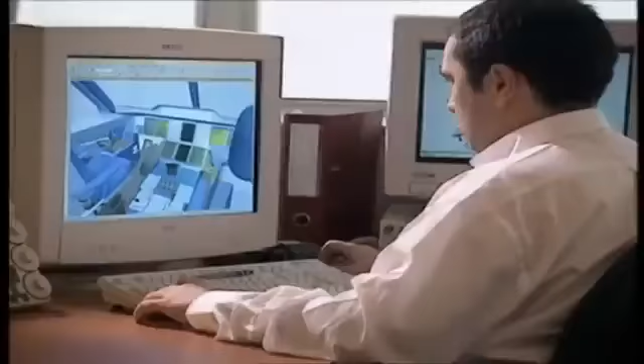It's a mega plane, bigger and heavier than any other passenger plane in the sky. It will hold more people than any commercial jet flying. Designers have spent billions. Now is the moment of truth. Will the world's biggest passenger airliner survive its maiden flight?

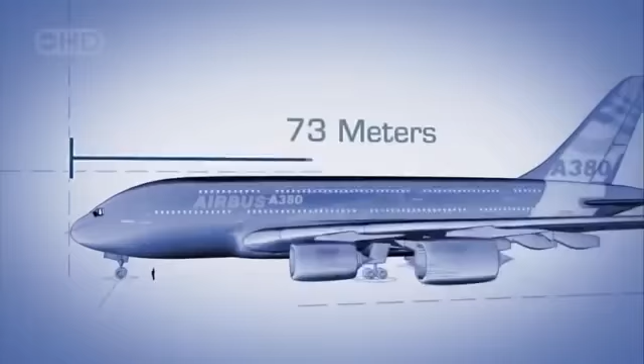An early spring morning, clear skies and a light breeze over southwestern France. Crowding the fields that flank Toulouse International Airport, 40,000 spectators, backpackers, campers and journalists from around the world, all vying for the perfect spot to watch the maiden flight of the Airbus A380, the largest passenger plane ever built. It's 73 meters long, 7 stories tall at the tail, almost 80 meters from wingtip to wingtip, heavier, longer and taller than a 747, with 2 full levels of seating, enough to hold over 550 passengers.

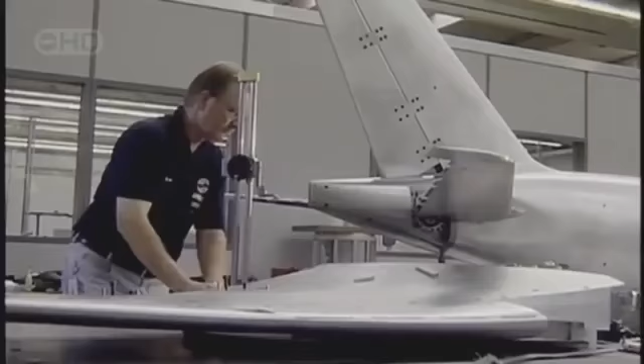Getting this monster off the drawing board required new, super lightweight materials, 4 powerful new mega-sized engines, massive new factories across Europe, and a computerized flight control system more sophisticated than any other in commercial aviation. This moment is the biggest gamble that the company has ever taken. A $12 billion investment, the company's entire future, and the lives of future passengers all ride on the success of this historic test flight.

Alongside the runway, a hush settles over the crowd as the megaplane comes into view. Gradually, it gathers speed, accelerating to reach its takeoff velocity of 269 kilometers per hour. Then, as it nears the end of the runway, the moment of truth. The massive nose tilts skyward. A sliver of daylight appears beneath the rear wheels, and the Airbus A380 takes to the sky for the very first time.

The engineers and technicians in the crowd breathe a collective sigh of relief. Their baby is flying.

The question now is, does anyone want a plane this big? Will the unprecedented size prove a boon or a boondoggle? Is this super jumbo the future of commercial aviation? Or the biggest white elephant since Howard Hughes built the Spruce Goose? It all depends on whether Airbus can convince airlines that travelers will want to trust their fates to this flying cruise ship.

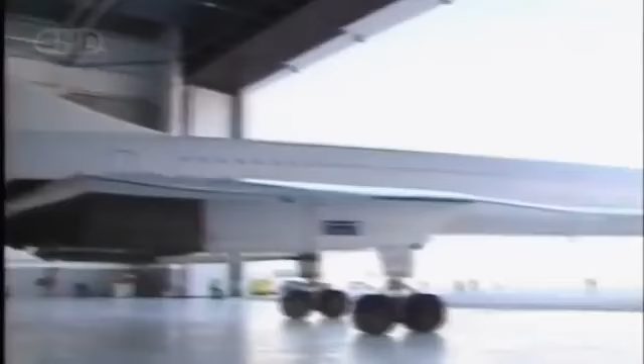The Concorde, after years of financial difficulties and a devastating crash in Paris, has been grounded. And the 747 is now an aging workhorse, noted less for style and more for the sheer number of passengers it can pack between its wings.

What changed to turn air travel from a luxury to the airborne bus ride that it is today? Simple economics. In just a few short decades, the number of people traveling by air has tripled. Now, every day, hundreds of thousands of people pack into 70,000 flights, taking off and landing at more than 4,000 airports around the world. And those numbers are only going to get bigger, much bigger.

Industry analysts predict that the number of air travelers could double again by the year 2020. That is, if anyone can figure out how to squeeze them into an already overcrowded system.

Both Boeing and Airbus saw the writing on the wall in the 1990s, but the companies each took a very different bead on the problem. Boeing believed that one of the biggest increases in air travel would be point-to-point flights: get on near your home, get off near your destination. Boeing put its muscle behind the 787 Dreamliner, a highly efficient plane designed to carry an average of only 250 people.

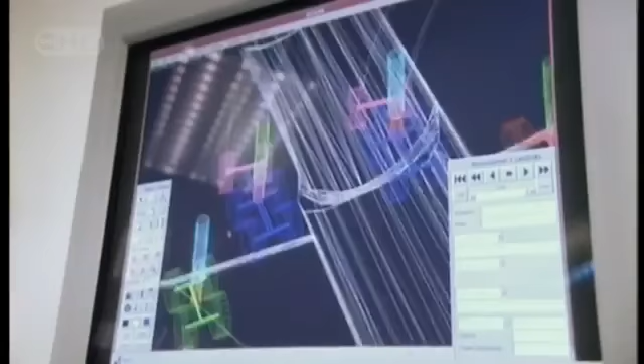It's a breathtaking dream, but no one knew if such a plane could be built. Some argued that such a craft would be far too heavy and expensive to be practical. But a tenacious and aptly named Airbus executive, Charles Champion, wouldn't take no for an answer. He encouraged his design team to think outside the box.

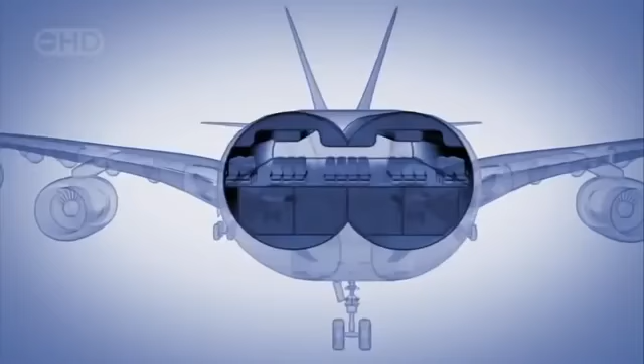Yeah, well, there were lots of weird designs. Some looked at the double bubble, a double-wide fuselage. It looked promising, but computer analysis showed that it would be far too heavy and not sufficiently aerodynamic.

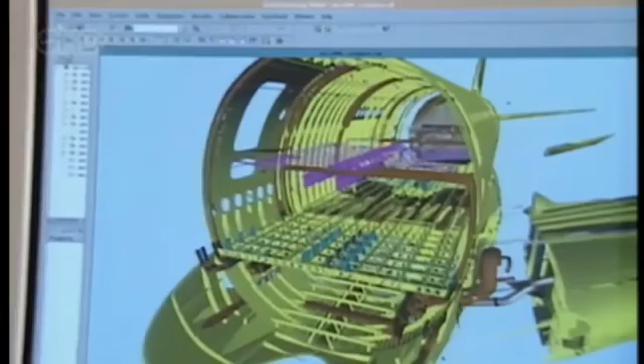So Champion sent his team back to the drawing board, and eventually they came up with this history-making concept: a full-length, double-decker passenger cabin, with a third deck below for cargo. Space-wise, it's the equivalent of 2 complete wide-body cabins, one on top of the other. The new plan called for an aircraft only 2.5 meters longer than Boeing's 747. It was 15 meters wider and 5 meters taller.

But when they ran the design figures through the computer, they had a shock. The plane was far too heavy. We came up with horrid figures, saying, my God, this is the weight of the aircraft, it doesn't work. So what we did immediately at the launch of the program, or 2-3 months afterwards, we launched a very strong challenge on the weight. The team set out to bring the base weight of the aircraft below 277 tons.

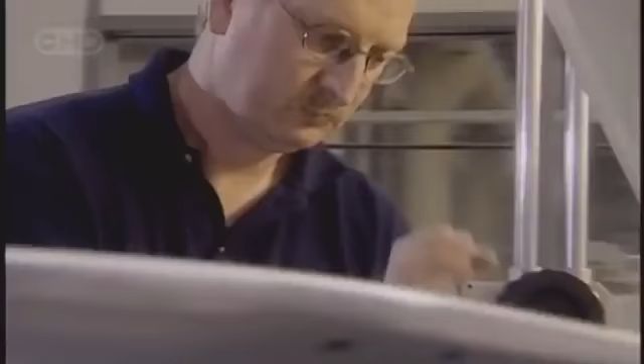That's only about 50% heavier than the 747, an ambitious goal for a plane designed to carry over 100 more passengers and their luggage halfway around the world. Unless Champion and his engineers could find the means to beat that target, the dream would die.

Airbus engineers were faced with a design challenge that called for a lightweight plane carrying over 550 passengers at a lower cost per seat, not to mention quieter and less polluting than anything in the air. The design team knew they would have to rethink everything. They needed lighter materials, more powerful engines, larger wings, even bigger and smarter factories. Every component would have to be scaled up from supersize to mega size.

But even while the engineers were still scratching their heads over the details, the Airbus sales force was already hard at work, seducing customers with visions of the future. They created a full-sized interior mock-up that promised passengers in coach some relief from the grind of travel, with seats an inch wider than in other planes, and overhead bins 10% larger.

Each plane can also feature a new interior illumination scheme to eliminate the upsetting effect created when flight attendants suddenly switch on overhead lights. The kinder, gentler system in the A380 mimics the gradual transition from day to night and back to daytime again. These and other innovations make the plane distinctive, but it's the promise of opulent luxury that really turns heads. To help build excitement, computer programmers constructed a virtual showroom where airlines can bring to life their wildest design fantasies.

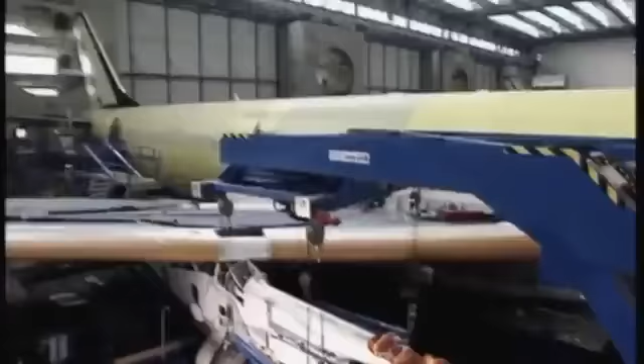Of course, no dream could take flight until engineers came up with a way to lift all that weight. In late 2000, builders finally settled on a design. For power, they would buy engines built by Rolls-Royce, capable of providing 30% more thrust than the engines used on the 747. Each massive power plant cost $15 million, as much as a ton of gold. Altogether, they account for almost 25% of the cost of the entire plane.

But if there's one thing this aircraft needs, it's thrust that won't quit. Each engine provides up to 80,000 pounds of force. Running at top speed, this mega guzzler sucks down a litre of gasoline every second.

The A380 is designed for routine flights lasting 13 hours or more. That means when it's fully tanked for takeoff, the A380 carries a lot of fuel: 260,000 litres, 20% more than the load carried by the 747.

Just imagine what would happen if anything threatened the integrity of one of those fuel tanks, like a catastrophic engine failure that sends shards of metal tearing through them. That's the nightmare that haunts engineers at Rolls-Royce, and they're about to destroy an engine to make sure it never occurs.

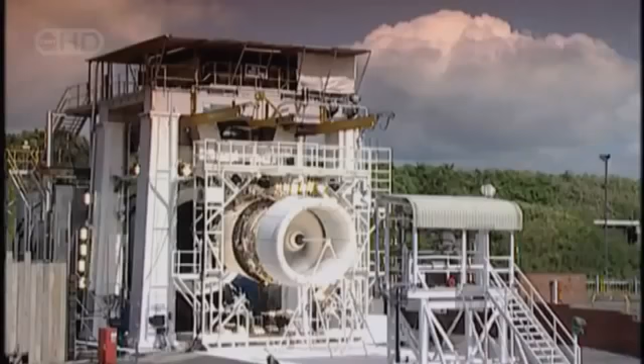These 24 titanium fan blades suck air into the maw of this A380 engine. Each blade is 1 meter in length and weighs 15 kilograms. Lightweight, but super strong. When the engine is roaring along at full throttle, the blades spin at almost 3,000 revolutions per minute. The centrifugal force at the tip of each blade is equivalent to the weight of a 110-ton locomotive. If one of these were to break off and escape into the engine, it could wreak unimaginable destruction to the plane.

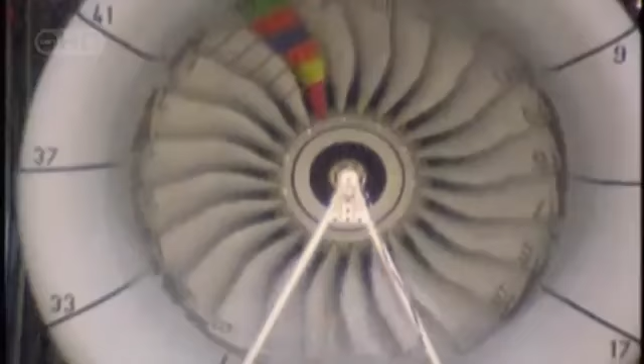That's why Rolls-Royce engineers are about to conduct an engine failure test. They're going to intentionally cause one of the fan blades to break off at full speed in order to prove that the engine enclosure can contain the damage without letting any metallic fragments escape. In the process, they will totally trash this $15 million engineering marvel, a small price to pay when the lives of over 550 people could be at stake.

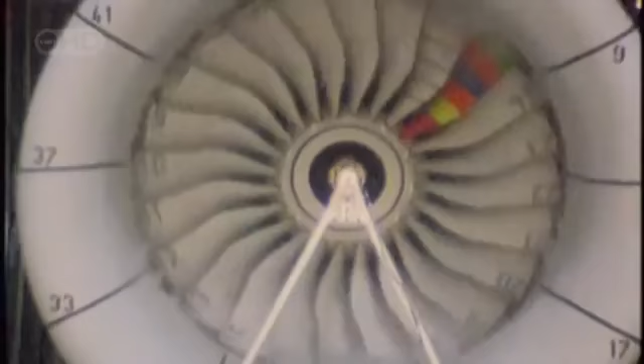A super slow-motion camera captures every moment in excruciating detail. The blades are striped to make visual measurement easier. When the fan is spinning at full speed, engineers send a signal to explosive bolts at the base of the multicolored test blade. Faster than even this camera can see, the knife-like piece of metal shears off and flies into the engine mechanism, wreaking havoc, but no fragments escape.

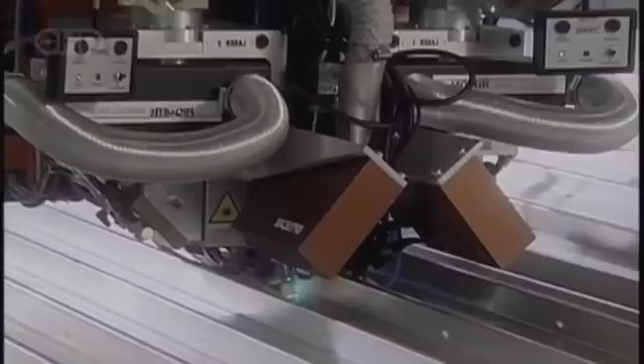The A380 engines are safe for flight, but there are many more pieces to the puzzle. Every other major component would have to be designed from the ground up.

Luckily, Airbus has already turned the world into a giant mega factory, with 1,500 suppliers and facilities used to build its existing planes, scattered over 30 countries, yet tightly linked by an advanced communication and transportation network.

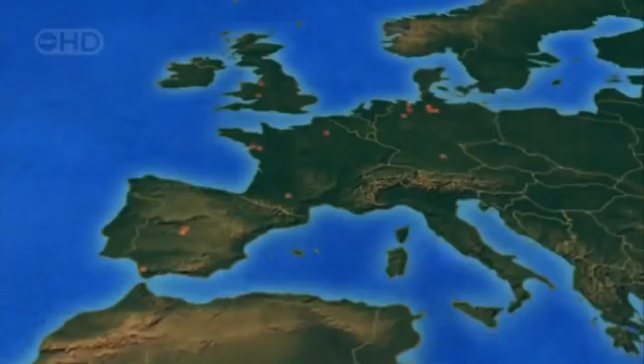To assemble the hundreds of A380s the company hopes to sell in the coming decades, planners settled on 5 countries to build the major components: wings in Wales, engines in England, the fuselage and vertical tail section in Germany, the horizontal tail section in Spain, and of course France, where all the pieces came together to assemble the finished plane.

The process begins in Wales, in 2 huge new wing factories, built to assemble the largest and most structurally complex commercial airplane wings ever designed, using 32,000 components shipped in from every continent except Antarctica.

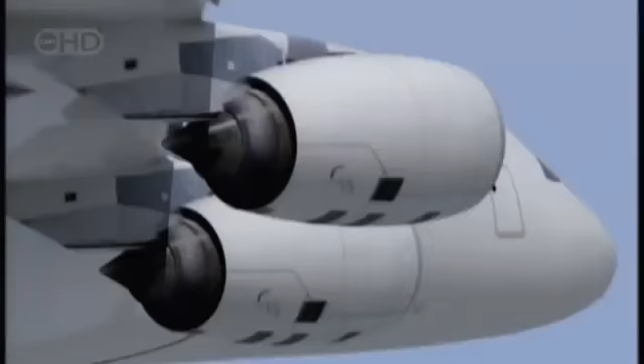The wings on the A380 are true mechanical marvels. They provide flight control and enough lift to carry the fuselage, plus the 4 supercharged engines, each weighing nearly 6.5 tons. And with 260,000 litres of fuel loaded inside 10 interior locations, the wings are also flying fuel tanks. They're one of the most critical structural components in the entire aircraft.

The precision construction process begins with sheets of aluminium, destined to be shaped into the 10 panels that cover each wing. Each piece has its own shape and weight requirements. To whip one up, just follow 3 not-so-easy steps: shave it, wrap it, then bake it.

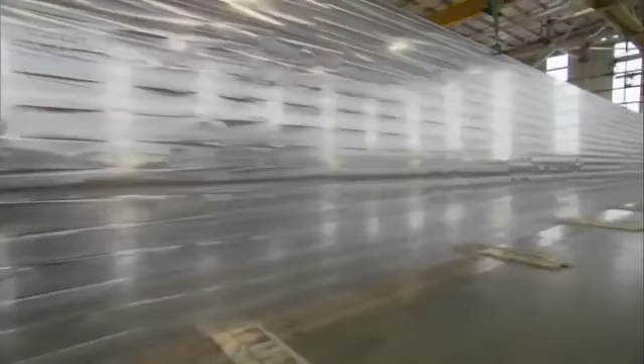This 34-meter-long slab of aluminium weighs in at 5 tons, way too heavy for the wing panel it's destined to become. In its final form, it will weigh close to 1 ton. So off it goes, to get the aerospace version of a tummy tuck. Overhead cranes use 32 powerful suction nozzles to lift and transport each aluminium slab.

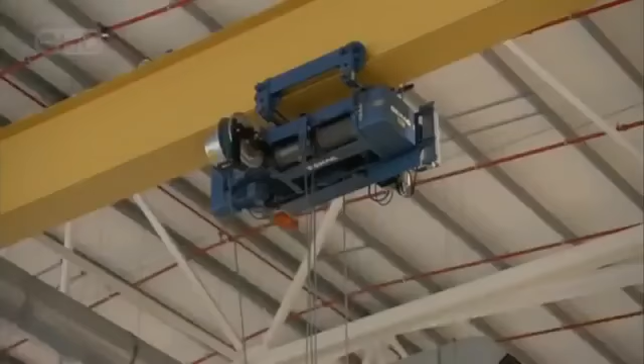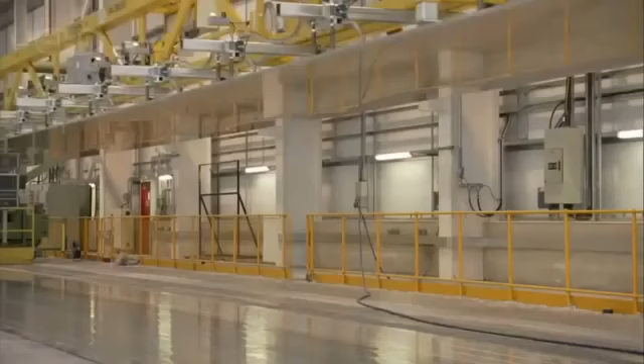Tim Fernifer carries the burden of responsibility. Using a remote-controlled steering device, Tim guides the 5-ton piece of metal across the factory floor, but he can't do it alone. His team must watch the motion of the wing panel throughout the ride. You've got to be particularly careful that I'm handling it, but I can't see down the other end, so I need another pair of eyes down the other end. It's just health and safety issues. You have to watch, make sure everybody's out of the way when it's actually moving. It's a dicey ride across the factory floor before the huge sheet can settle safely into position.

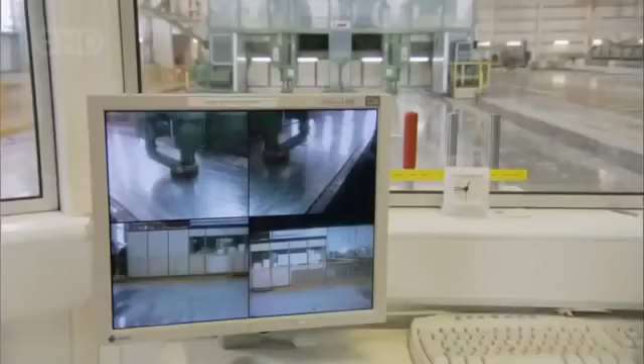A milling machine 40 meters long. Like an oversized cheese grater, the precision cutting head slowly cuts back and forth across the surface of the wing, painstakingly shaving the aluminium until the panel shape matches the 3D contour map stored in the machine's computer. The process takes up to 3 days.

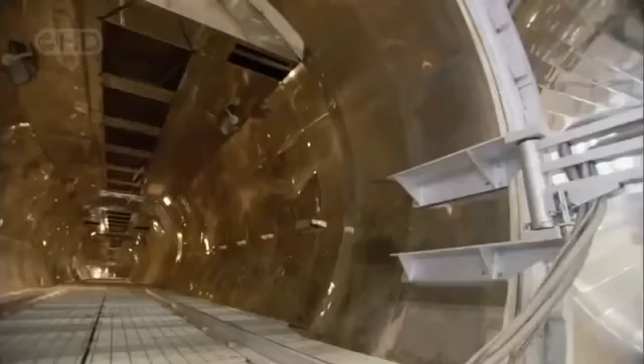It eliminates 75% of the panel's weight while maintaining its strength. Then it's ready for the oven, one of the world's largest pressurized heat chambers, 42 meters long, almost 6 meters wide. Technician John Massey has cooked plenty of wings for smaller Airbus planes, like the A320. It's a challenge to see it go from the size of the 320 to the size of the 380. It's a huge, huge jump. The A380 wings are 50% larger than A320 wings. That means a 50% greater chance of error in this critical process.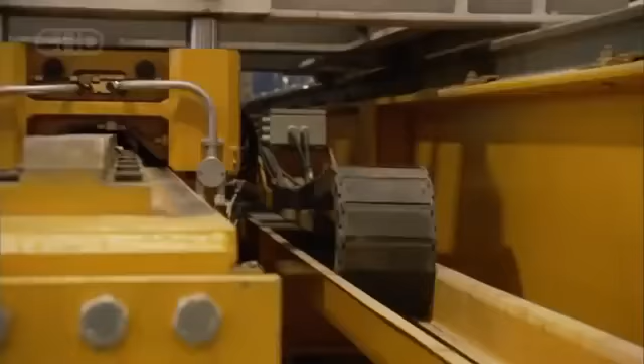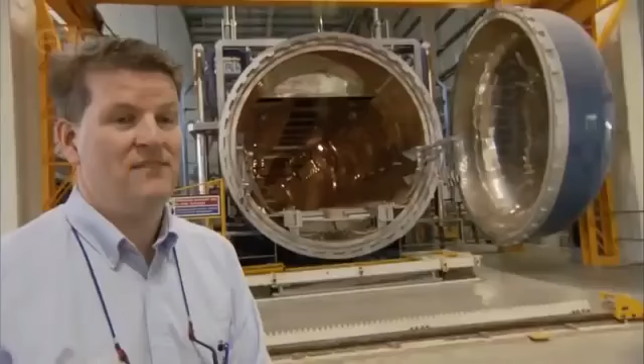Baking requires careful setup. First, Massey and others place the segment in a special metallic form. Then they vacuum seal the entire assembly with a massive piece of plastic shrink wrap to protect the metal from contamination. Inside, the heat must be uniform across the entire panel, 150 degrees centigrade, with no room for error. We try to avoid any changes in the vacuum or the temperature, so the temperature must remain constant right throughout the process. It must maintain within 3 degrees. Otherwise the run is invalidated. After 24 hours, the panel is ready.

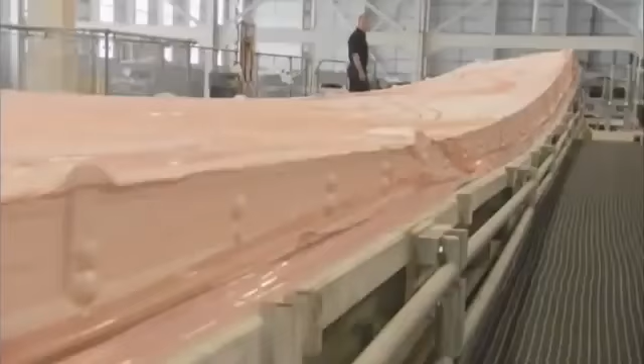Specially equipped vehicles rise up and move into place in front of the oven. All eyes are on the plastic protecting the wing panel. If it breaks, the aluminium wing piece is compromised. A disaster. The entire wing panel would be worthless. If the bag bursts, it means starting the job again from scratch. Anxiously, they scan the surface for any breach. At last, the wing is cool enough to touch. And good news, the bag appears to be intact.

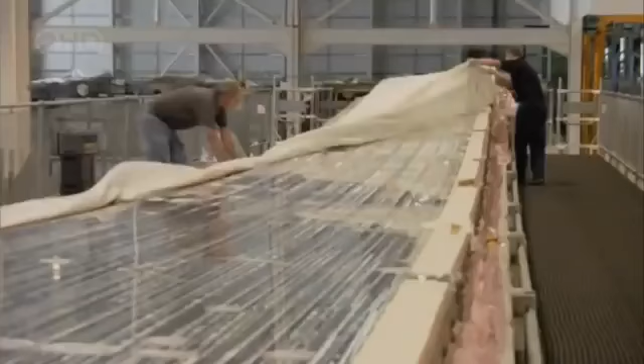Finally, the wing segment arrives in its docking bay. Here, the technicians first remove the plastic and cloth wrap. Now begins the tedious search for flaws. John's boss, Gareth Williams, arrives to inspect the piece. He retrieves small metal rods that were baked onto the top of the wing panel. Each of these cylinders tells an important story about future safety. These are test pieces which are made of the same material as the wing panel, and we use them to confirm that the heat process that this part's just gone through is correct and it's to the right specification.

When this testing phase is complete, Gareth and John get the okay to move the wing to its next destination, the nearby wing assembly plant, an enormous brand new factory located just up the road. It's one of Britain's largest industrial buildings built in this century. It's nearly 85,000 square meters in area, equal to 12 full-size football pitches.

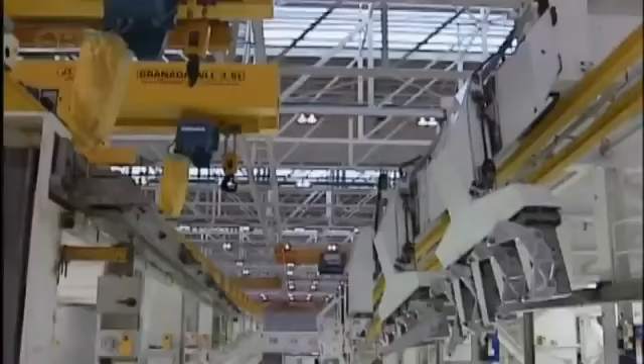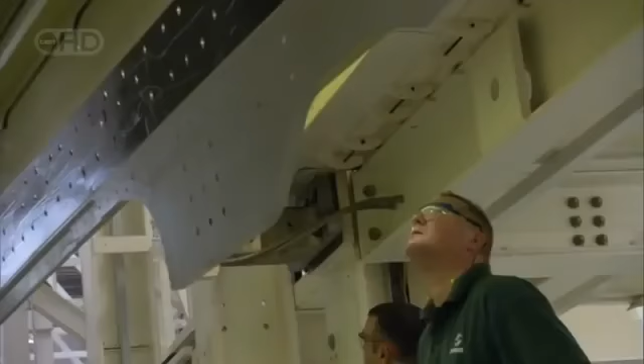This is where the builders attach the aluminium skin panels to the wing skeleton. George Lee guides his team through the tricky assembly process. Today they're preparing to lift and place one of the largest of the 20 aluminium panels, 34 meters long and weighing in at more than 1 ton. Size is a great challenge because everything requires some form of overhead lifting. Nothing can be lifted manually, so virtually everything requires overhead craneage movement, and therefore the management of the craneage system is very, very important. The panel hangs like a huge guillotine, suspended over the factory floor.

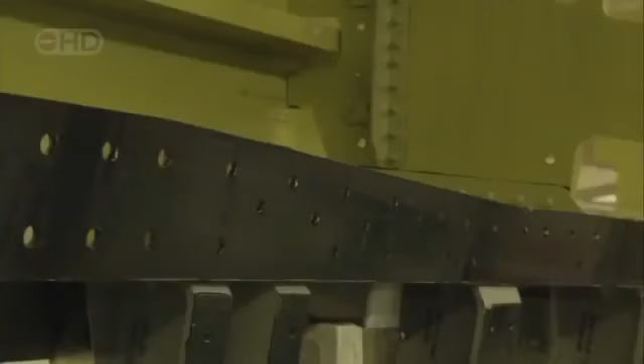But that's not all that's hanging over the assembly team's head. Time is running out. Along the edges of the partially constructed wing, builders have applied a sealant that will help to ensure the integrity of the fuel tanks. The sealant dries quickly within hours. The team must fit the wing panel into place before the sealant dries, or the wing could be defective. This time they're cutting it close. The only concern I've got is the time factor. If they don't succeed, the team will have to scour the sealant off the aluminium surface and start the whole process again.

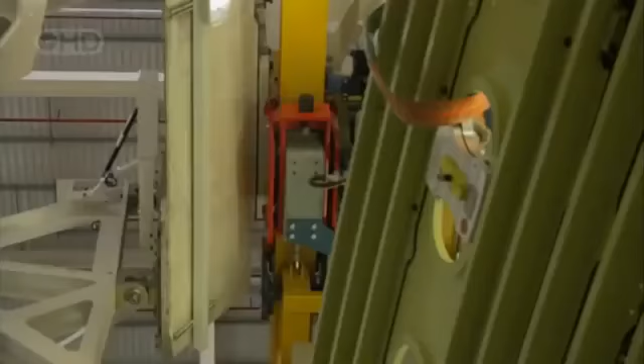Finally, the panel settles into place. 1 down, 9 to go. It can be stressful, yeah, it can be stressful. At certain times, it's an enjoyable job, because when it actually all works and goes together, it's quite enjoyable. You've made it an achievement. Now it's time to glue and bolt together the pieces, like building the world's biggest model airplane wing.

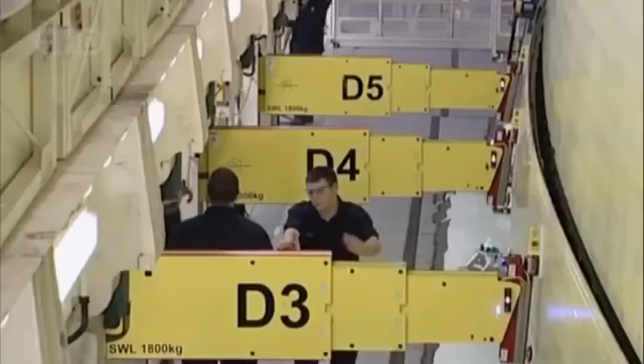This part of the process remains a carefully guarded trade secret. The company wants our cameras off. No cameras.

The secret assembly process inside the jig will take nearly 4 weeks to complete, but it takes more than a wing to make a plane.

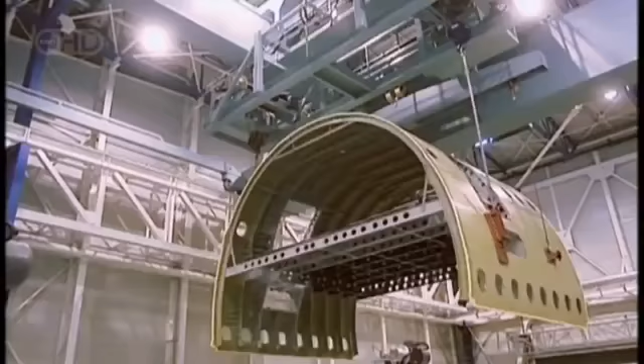All across Europe, more factories are coming online, pumping out body parts of this giant Franken plane. But not everyone is happy to see this kind of progress. Some locals in Germany are up in arms over Airbus's ambitious plans.

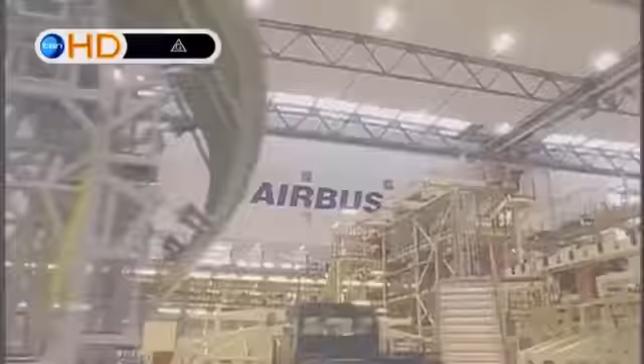This is the newest Airbus factory in Hamburg, a megastructure big enough to house 4 A380s side by side. Airbus has been building airplane fuselages in Germany for more than 30 years. But with the announcement of the A380, the company needed to massively expand the site and send finished planes here to get tricked out on the inside and painted on the outside.

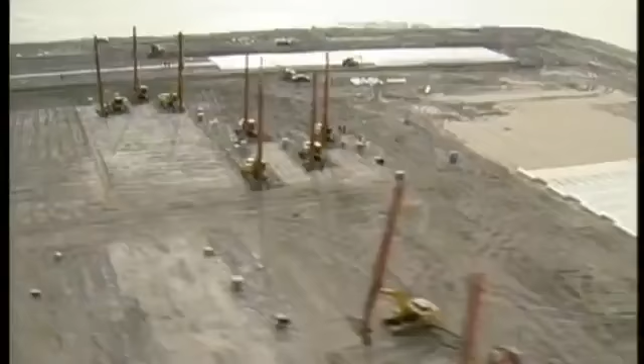No matter what the customer wants their plane to be, a 550-seat cattle car, a high-class hotel in the sky, or even a heavy-duty freighter, this is where the seats, the carpets, the stairs, and yes, even the bar and the waterfall will all be installed. The expansion plan called for 3 new buildings and a longer runway to accommodate the massive plane, but there was a problem.

Airbus's main factory here sits alongside Germany's Elbe River, smack in the middle of Europe's largest tidal wetlands. It's a very special area because we have there the influence of water from the country and tidal water from the sea, so we have a mixture of sweet water and salt water. This fragile ecosystem is home to 70 species of migratory birds. Now 71 if you count the Airbus A380.

Airbus wanted to fill in 140 hectares of pristine wetland, and local activists cried foul. A pitched battle in the courts and demonstrations in the streets delayed construction of the factories for over 2 years. But eventually, local and national politicians who wanted to bring business to the community intervened.

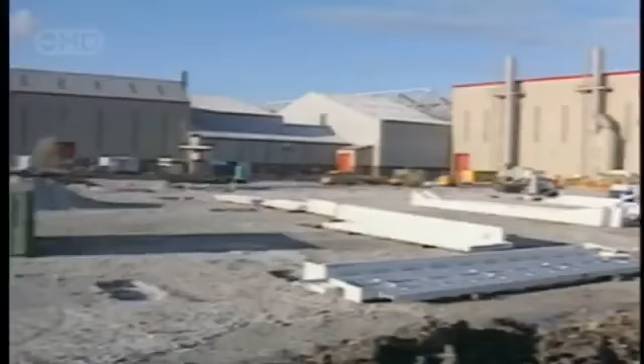The factories went up. One got busy building fuselage segments, but the other 2 stand nearly empty. More lawsuits still block the Hamburg facility from taking delivery of all of the planes it's meant to finish. Unless the company wins in court, it may have spent a few $100 million building a factory of little use.

The problem lies with the runway. Airbus needs a longer runway to accommodate a heavy-duty cargo version of the A380. We need the runway extension in Hamburg for the pilot to test the performance of the aircraft, and he only can test this when he has an aircraft with a weight which is approximately the weight you normally have in cruise altitude and a normal scheduled flight.

That plan to lengthen Hamburg's existing runway has met with considerable resistance from locals. Their concern: extending the runway will bring the tarmac to within just 450 meters of village orchards, and uncomfortably close to a Lutheran church that houses a priceless organ built in 1688.

A delicate instrument that could be damaged by ground vibrations and wake vortices, turbulent bands of air similar to miniature tornadoes. We have very precise information on the generation of these wake vortices, small tornadoes, wind generated by every aircraft, which can affect buildings and also persons close to the runway or close to the flight path. We have predictions that we should expect occasionally winds up to Beaufort 12, which is about 130 kilometers per hour in the core, and these tornadoes will hit the church tower and the roof construction.

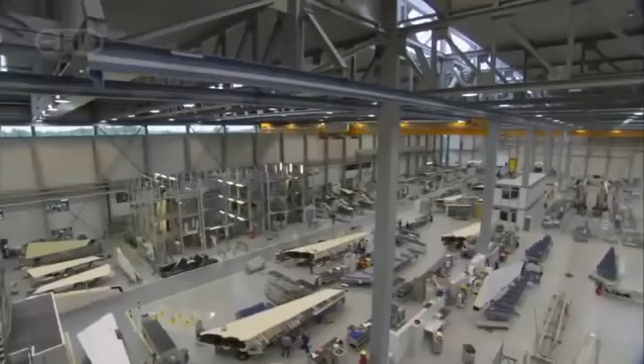The lawsuits are still working their way through the courts. Legal action by angry locals is one risk the company is vulnerable to. But just 57 kilometers away in the town of Stade, another big gamble is underway. The company is using a futuristic material to build the largest commercial aviation tail fin in the world. It's called carbon fiber reinforced plastic, made out of the same stuff that gives diamonds their incredible strength.

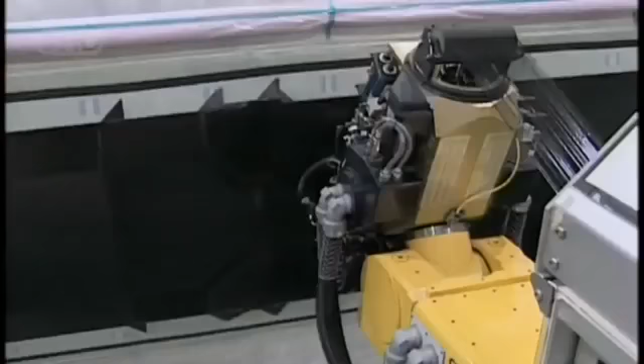Carbon fiber is 6 times stiffer than steel and much lighter. It's the only option if builders are going to keep the weight of the plane below the target of 277 tons.

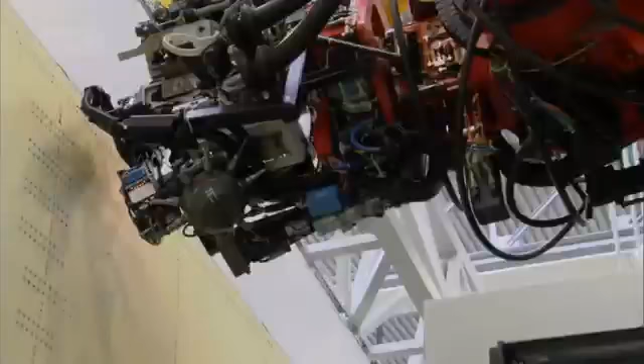Unlike forged metal, carbon-reinforced plastic parts are actually woven, like cloth. Fabricating machines spin out tail panels by combining super-strong carbon fibers with plastic resin to create almost any shape the designers can imagine. After baking, strengthening, painting and drying, technicians join the lightweight panels to the tail skeleton with the help of this computer-controlled riveting robot. Working around the clock for a week, the robot makes 10,000 critical connections with tolerances no human can match. The integrity of the tail fin is crucial to the safety of passengers.

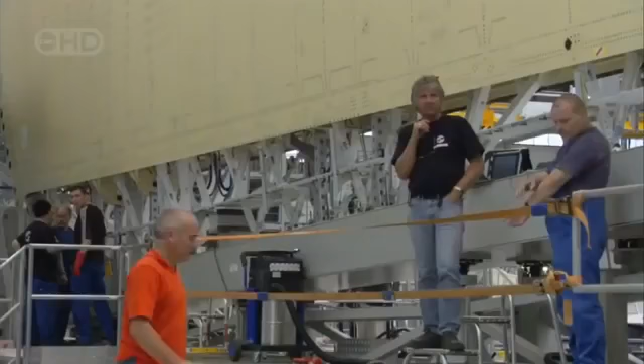Airbus engineers know only too well what can happen if a tail structure fails. In 2001, American Airlines Flight 587 left JFK Airport in New York. Less than 2 minutes later, the aircraft had crashed in Rockaway, a neighborhood in Queens, New York. The belly fell, the plane pitched, then the left side gave way and it slid all the way down.

It was the second deadliest crash in US history, and investigators made a disturbing discovery. It had been caused when the tail fin and rudder, made partly out of composite materials, sheared off as the plane accelerated. Investigators concluded that cockpit errors, not a failure of the carbon composite material, most likely caused the crash. Builders have applied the lessons of that catastrophe to the tail fin of the A380.

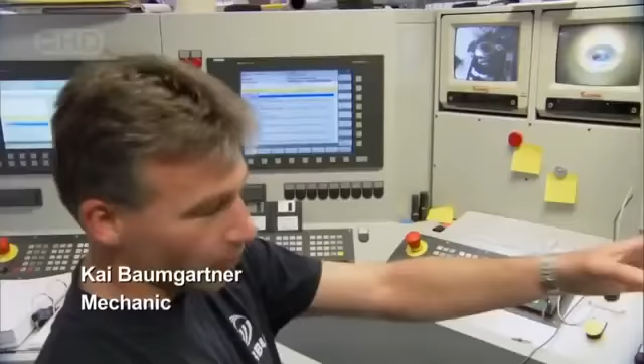But today, something's gone wrong on the factory floor. A lightning strike zapped the power supply, and now the precision riveting robot is dead in the water. We had a storm, a lightning strike. The PC failed and the hard disk was completely gone. Mother Nature has thrown a wrench into the works, causing a total crash of the system. It is electricity. Sometimes it happens. Normally we are protected, but it can just happen.

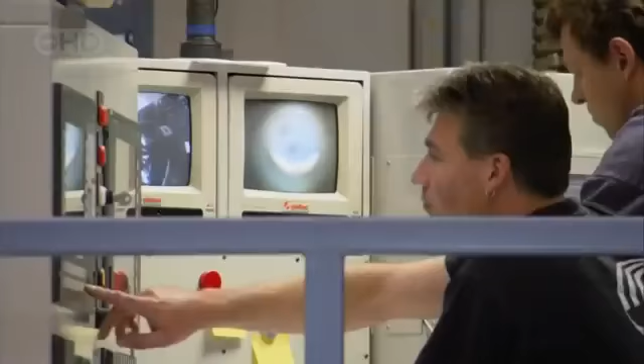Critical hours pass as Kai Baumgartner and his colleagues struggle to get the robot back online. If they can't fix the computer, they can't make the deadline set for finishing this tail fin. Kai and his team must find the problem, and quickly. By the end of the shift, the sound of riveting echoes through the factory once again.

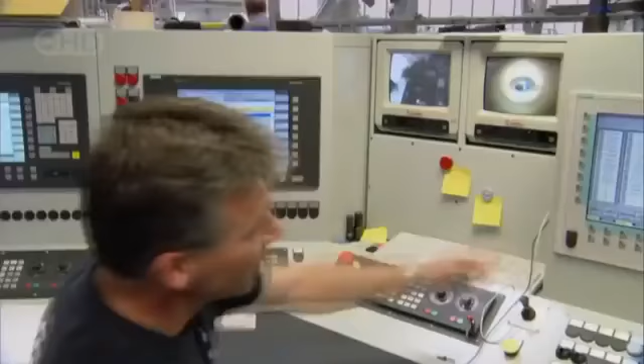Kai is finally back at work, personally verifying that every one of the 10,000 connections is perfect. A tiny camera positioned on the end of the riveting machine allows Kai to carefully examine each rivet, making sure to catch any abnormalities in the process. I make sure that the drill doesn't get stuck or any mistakes happen. I have my different systems here. It can happen that something is stuck or that an error occurs. It's a repetitive process, but Kai must remain vigilant to safeguard the lives of future passengers.

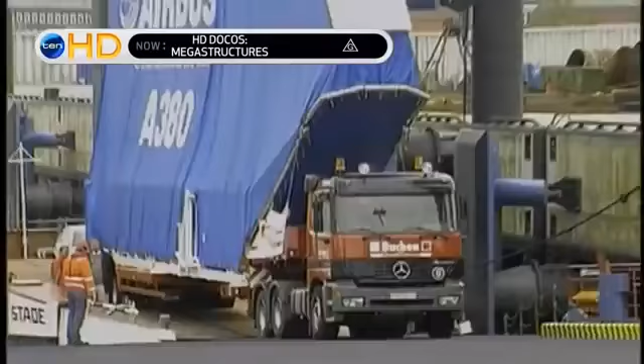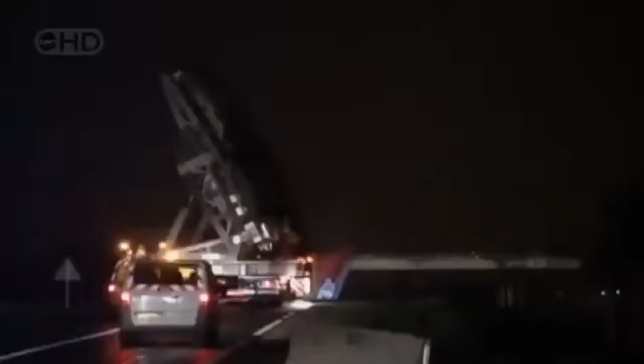Around the world, manufacturers and suppliers are putting the finishing touches on the components of the A380. But putting all the pieces together will be a logistical nightmare. Airbus's existing transport system, the custom-built mega freighter called the Beluga, is too small to haul the A380 components to the assembly factory in Toulouse, France. So builders came up with a risky plan to haul millions of dollars of critical components by water and land.

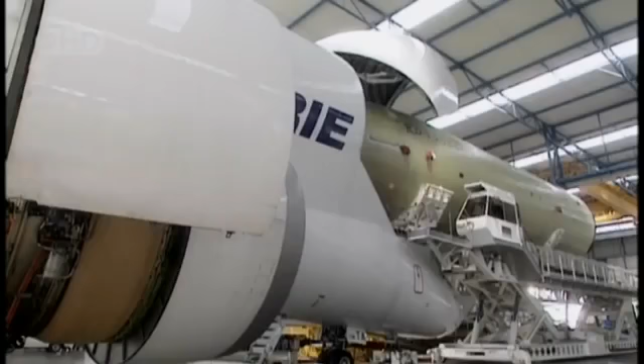Airbus had a problem. They needed to move pieces for the largest passenger plane in the world from factories all over Europe to their final assembly plant in Toulouse, France. For smaller planes, they could use the Beluga, Airbus's distinctive custom-built transport plane. The Beluga's cargo hold measures 7 meters high, 7 meters wide, and 38 meters long, big enough to swallow the fuselage, wings, and tail sections of Airbus passenger planes like the 150-seat A320.

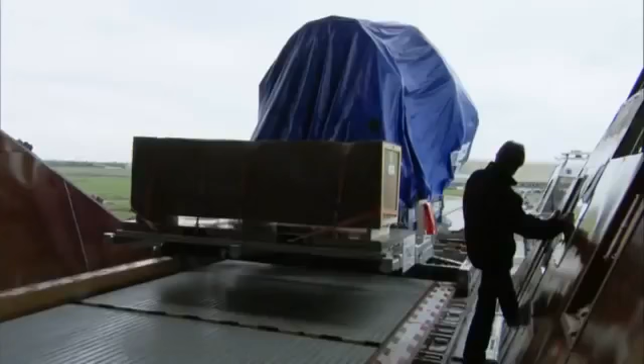When Airbus decided to build the massive A380, the sheer size of the parts overwhelmed even the Beluga transport plane. The Beluga is far too small to carry the A380's enormous double-decker fuselage or its record-breaking wings. So to get their parts to the assembly plants, the company now had to move them by sea and over land, instead of a 2-hour ride in the belly of the Beluga. Parts for the A380 joined a days-long parade of specially outfitted ocean ships, river barges, and trucks.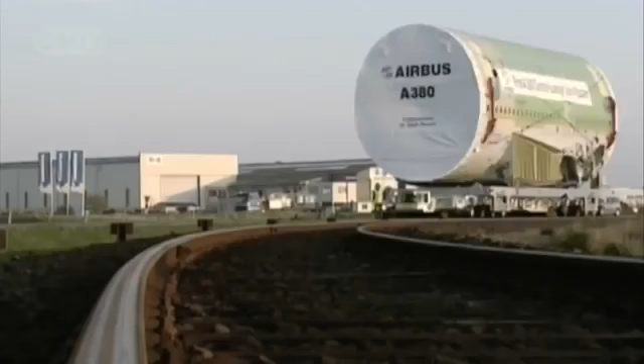Keeping this massive system on schedule is the job of Surface Transport Coordinator Philippe Nedelec, who has to keep it all moving fast. I like to say that I am a kind of conductor. I have to impose the tempo to everybody.

Wings and fuselage arrive by sea in the port city of Pauillac in Bordeaux. From there, it's 96 kilometers by barge down the Garonne River. It's a tricky bit of navigation to clear the historic Pont de Pierre Bridge, a prized landmark built by Napoleon almost 200 years ago. We have to cross a very old bridge. And at the beginning, the Bordeaux people were very afraid of what these Airbus people were going to do with our nice bridge.

To maneuver beneath the Pont de Pierre, Philippe and his team keep careful track of the tides and the weather. If they don't time their trip just right, if the water is too high or the current's too strong, they could collide with the bridge, destroying precious cargo and damaging a priceless piece of history as well. But waiting for the perfect moment isn't always an option. Suppose we miss a call for weather condition or some other things, then the boat can miss a tide, so we can miss 6 hours. And this 6 hours you can miss 1 week, because we cannot start the convoy, the road convoy, every day. It's not so easy. We cannot start when you want.

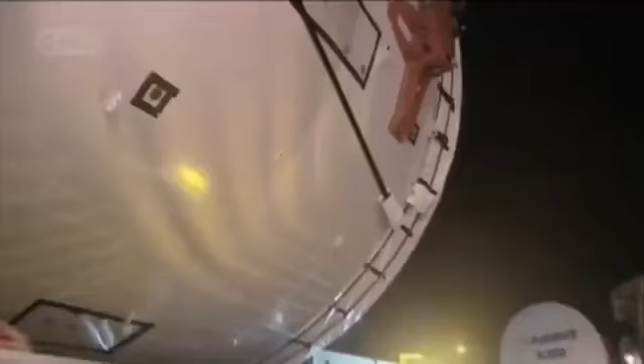Next, it's a handoff to a fleet of trucks and their escorts. Now it's a slow crawl, 16 kilometers per hour for the last 250 kilometers of the journey. You cannot leave these trucks alone. It's very, very strange. People are very, very interested with that and very pleased. It's like a show, a permanent show, paid by Airbus.

So far, this roadshow has had an exotic appeal. But will they still be clapping when convoys like this grind through town once a week? Ultimately, that's the pace Airbus will have to keep if they're to meet their manufacturing targets. At last, the convoy arrives at its destination, the final assembly line, the nerve center of the entire operation. The final assembly line sits on the edge of Toulouse's Blagnac Airport. As with all A380 factories, this one is huge, 500 meters long by 250 meters wide and 15 stories tall.

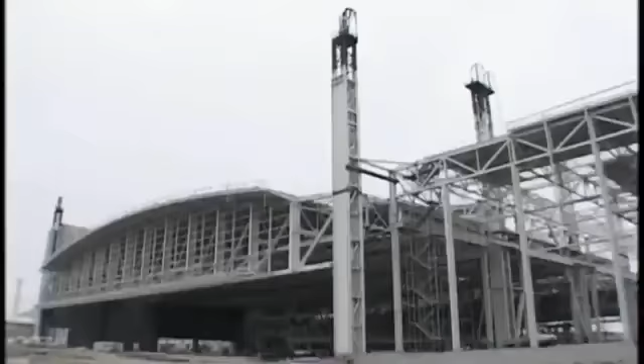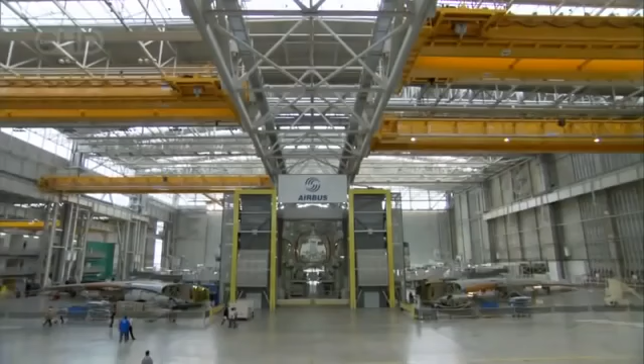32,000 tons of steel, enough to build 3 Eiffel Towers. It's in here that the massive plane finally begins to take shape, with the help of a gargantuan assembly structure known as a jig. According to Julien Pouillou, there's nothing else like it in the world. We're standing in front of the biggest jig that is used in the world to assemble an aircraft. This is the Station 40.

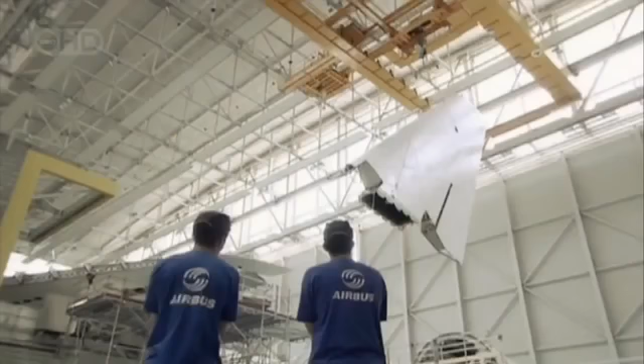Station 40 is where the fuselage, wings and tail all come together. The one-of-a-kind jig stands 5 stories tall, weighs 1,200 tons, and comes equipped with 4 elevators to carry workers to their stations. This is where theory becomes reality, as pieces made all over the world finally come together. If there's been any error, if the pieces don't measure up to spec, or if the joints don't come together just right, within millimeters, the huge passenger craft won't be fit for flying.

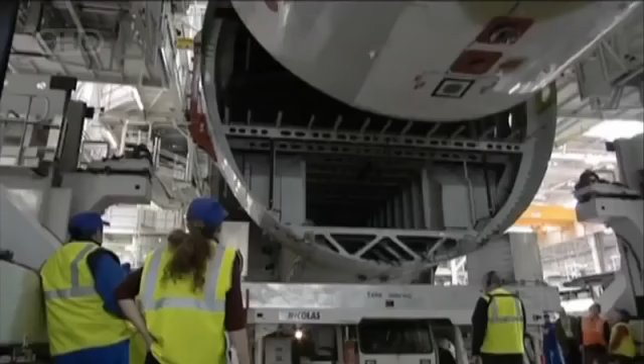The lives of future passengers depend on the steady hands of these craftspeople and engineers, working inside the mighty Station 40. The challenge is for us to assemble those pieces together at the same time, because we have a lot of workers working in the same area at the same time, and they have to do all sorts of completely different tasks. One has to take care of the wings and one has to take care of the fuselage, and so they are not doing the same job, but they have to do it together.

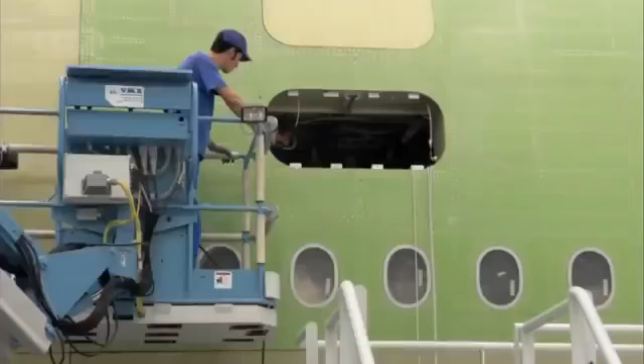Work on this plane now proceeds at an intense pace. It'll take 4 weeks to complete the assembly. Once the plane has been released from Station 40, it moves through a pair of 100-meter wide sliding doors and makes its way to the systems hall. Inside this gigantic space, 3 A380s can sit side by side comfortably, while technicians swarm over the superstructure, testing the electrical, hydraulic and plumbing systems that'll bring the dormant aircraft to life.

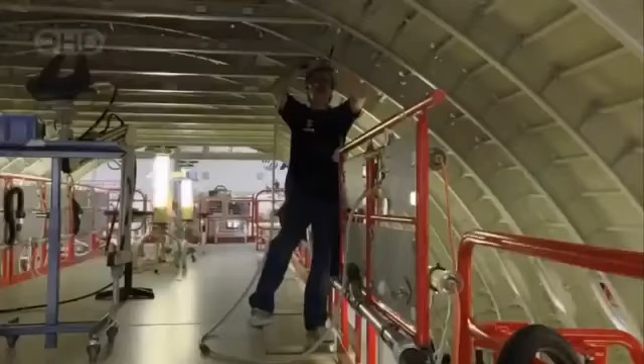Building just one A380 is a massive job, but for Airbus to survive, they're going to have to speed up production to a breakneck pace. Eventually, the Station 40 team will have to crank out a defect-free plane every week.

But before that can happen, the plane must be proven airworthy. Now all eyes are on the skies over southern France, as the gathered crowd wonders, will the A380 survive its maiden flight?

At Blagnac Airport in Toulouse, 40,000 people anxiously scan the skies, searching for some sign of the A380. All flights in and out of the airport are put on hold. The skies over Toulouse are eerily quiet.

Nearly 4 hours have passed since takeoff. If all goes as planned, the huge airliner should swing into view at any moment. But if there's a problem, the flight crew will quickly discover how well their training has prepared them for disaster.

Much of that training took place using powerful computers, programmed to mimic the behavior of the A380. That's the theory anyway. In a simulator like this one, with a computational engine 500 times more powerful than a home video game console, photorealistic visuals help pilots get a feel for the plane.

Despite the A380's unprecedented size, Airbus engineers have tried to make it fly like any other airliner. 100 knots. The task of testing the verisimilitude of the simulator experience rests on the shoulders of pilot Claude Holbeck. I would say that it's exactly as a conventional aircraft. And it's quite amazing because this aircraft is so big and so heavy. This surprised most people, and especially pilots.

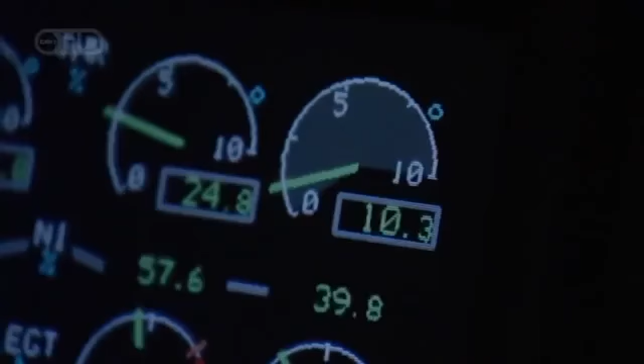One of the most important functions of simulators is to give pilots the chance to flirt with disaster. Very simple, and one engine is shut off. This is engine number 4, and look what is happening. The aircraft is just moving slowly on the right side.

It would take a lot more than an engine failure to knock this monster out of the sky. But test engineers are nothing if not imaginative, and they've loaded their simulators with more than 400 different catastrophe scenarios, everything from a fire in the cargo hold to a devastating lightning strike.

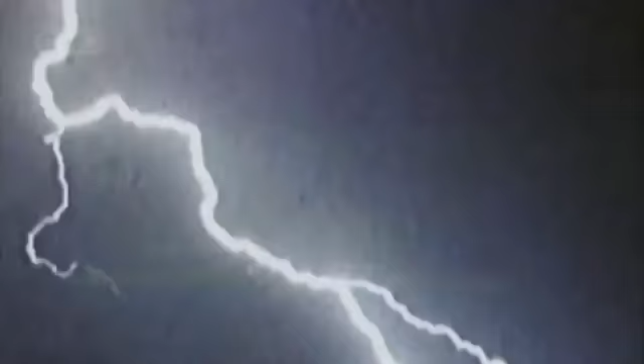The exercises are useful, but no computer can simulate the awesome responsibility of shepherding 550 passengers through the stratosphere. The challenge is to fly with many passengers. I think this is the greatest challenge, yes.

Outside, all eyes are on the sky. The wait is excruciating. Then, a glint of reflected light. At last, the mega plane sails into view.

Eager reporters and photographers race to the edge of the tarmac to record this historic moment. A showy flyby excites the crowd. It makes a steep turn, lines up with the runway, begins final descent.

Then, at long last, touchdown.

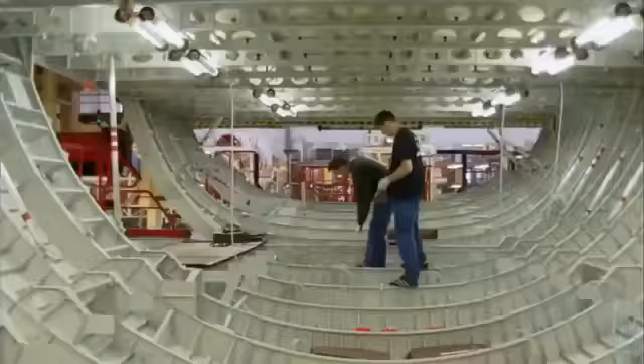They've proven that the plane can fly, but that may have been the easy part. At the time of the test flight, Airbus had 154 orders and still needed 96 more just to break even. To fill those orders, they must dramatically increase the speed of production and convince the world's airlines to pay nearly $300 million for each plane.

But even while potential customers were lining up to drool over decor, and the engineering team was still basking in the afterglow of the successful first flight, Airbus surprised the industry when it unexpectedly announced a 6-month delay in the delivery of the first aircraft.

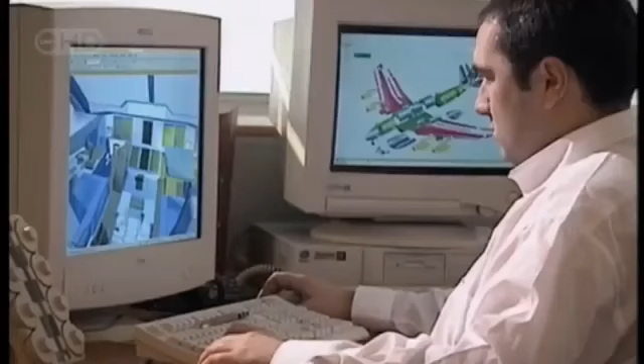Early customers who took the risk and put down deposits before the first plane had ever been built are not happy. Some analysts believe the plane is still heavier than Airbus promised, but Airbus insists that the delay is merely routine. The real achievement will be when the customer says, 'Great, this is what I expected, I love it, give me more.'

If the last 40 years in the history of aviation is any guide, and more people fly further and more often, year after year, then Charles Champion's daring bet may well pay off, and the A380 just might become the flagship of commercial aviation well into the 21st century.